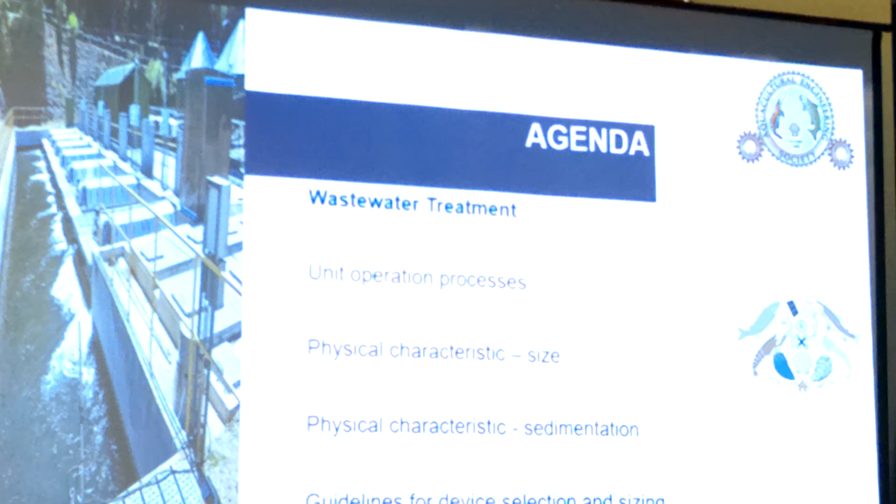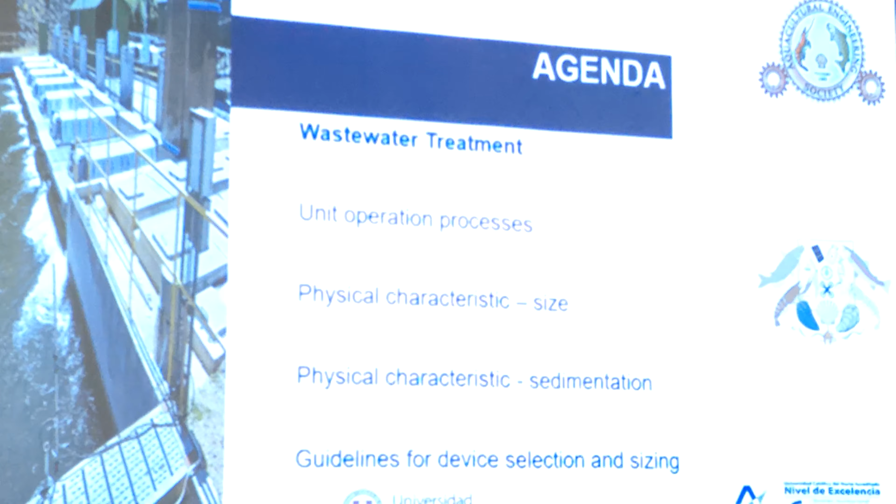So you're welcome to visit that. The topic I'd like to go through today is wastewater treatment, unit operation processes, physical characteristics, size, sedimentation, and finally some general guidelines for device selection and sizing.

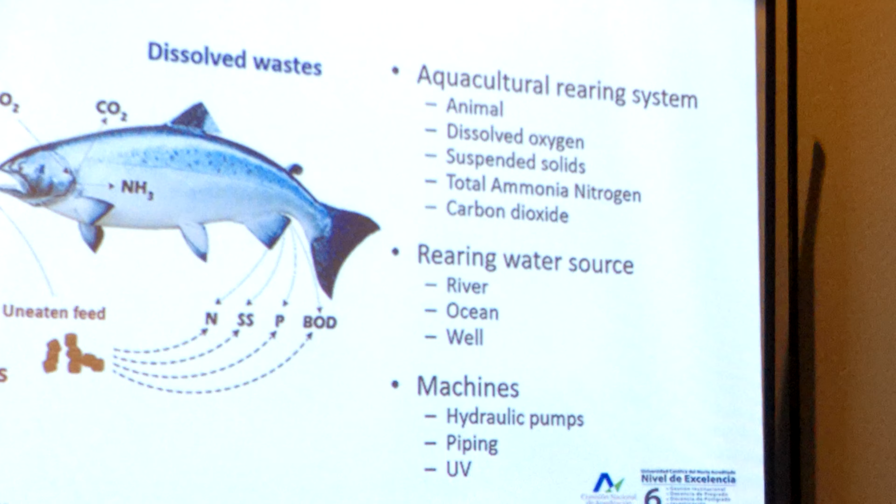But as you can see here, in aquaculture, everything starts with feeding your animals. And when you feed your animals, all the trouble starts when you look at it from the engineering perspective, because the biology of the fish or animal will be doing some transformation of that feed.

One of those transformations is taking the feed and doing some digestion, but not all feed will be digested, so feces will be released, and not all feed will be eaten, so some feed will be left. Those become particulate waste that, when you're doing a flow-through system, maybe it's not a big deal in your tank, but it will be a big deal in the environment.

But if you start doing partial recirculation, then it becomes a big deal. Then we need to go to the mass balances and try to figure out the concentration and flow rate to keep a certain load of solids in your system. And if you do full recirculation, it will be even worse if you don't take care of removing those solids.

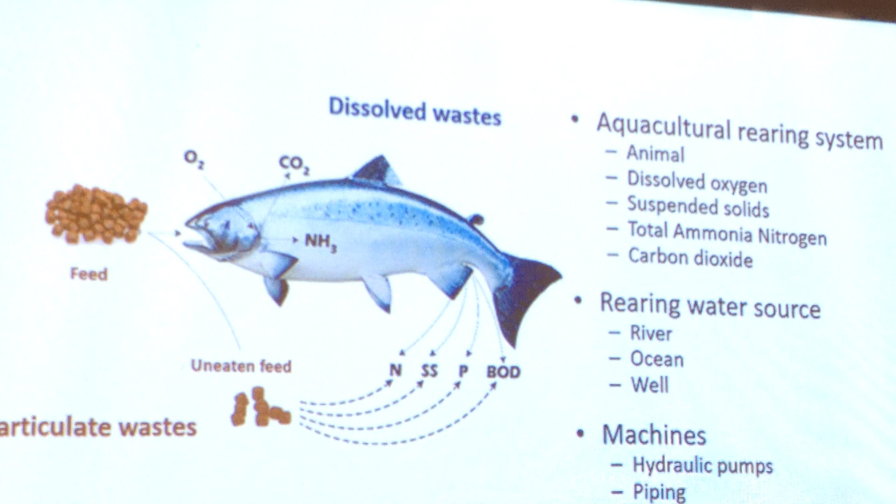Besides, if you have machines in your recirculation system, let's say a UV system, that UV system could not perform very well if your water is too dirty because of the presence of solids. Also, you have to design your piping very well so as to not allow solids to settle in the piping. We always talk about how many solids settle in our fish tanks or in our settling devices, but I don't know how many of you have looked at your piping - how many solids settle within your pipes?

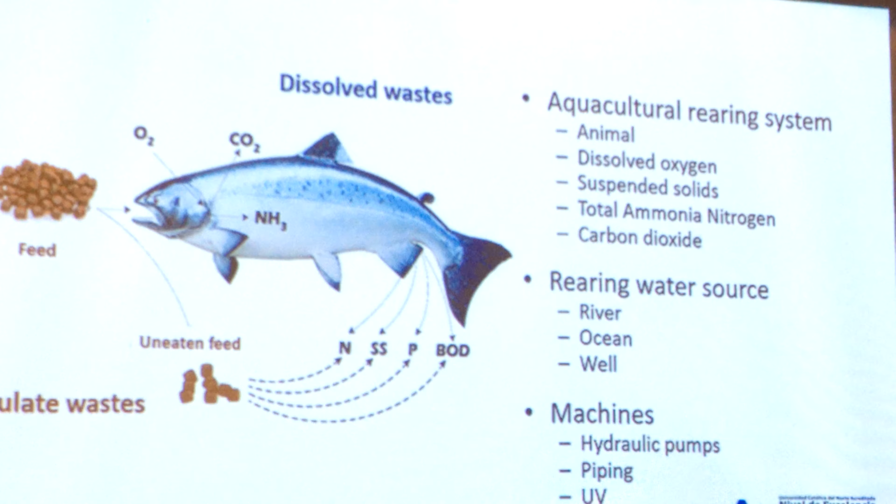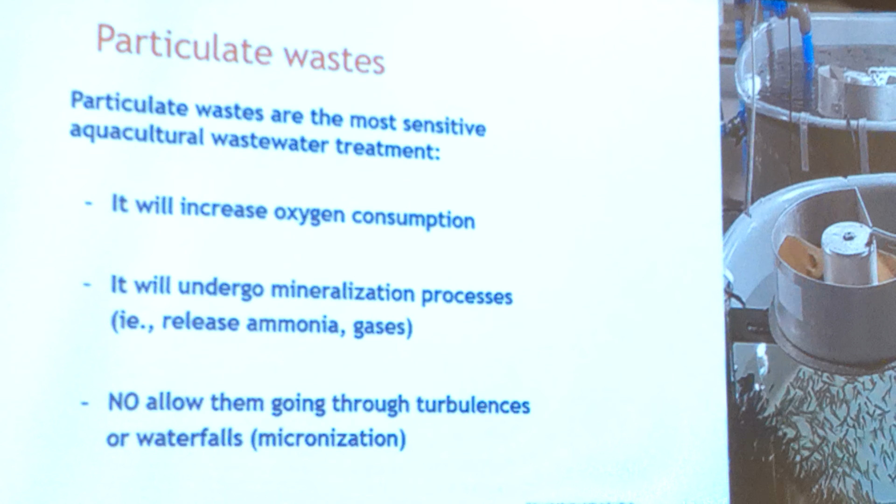So, saying that, why do we want to remove solids in the first place? Hopefully, I would say we're able to put a cannula in the anus of each fish, but that's impossible to do. So we want to remove the solids because if they stay too long in the water or in the system, they will go through several processes.

One of those could be mineralization. And if you're not doing aquaponics, you don't want other nutrients accumulating in your system. If you do aquaponics, you want the mineralization to happen, but otherwise you don't want that, because if mineralization occurs, you'll have a lot of bacteria doing the work, consuming a lot of oxygen, releasing more ammonia, and becoming flocculent and stuff like that.

Something that Ed, and especially the last talk, was discussing is tank design, and how you handle the solids. Solids are not like stones, they are very soft. Whatever waterfall or turbulence you have will break down those solids, and as they break down they become very small, making them more difficult to remove from your system.

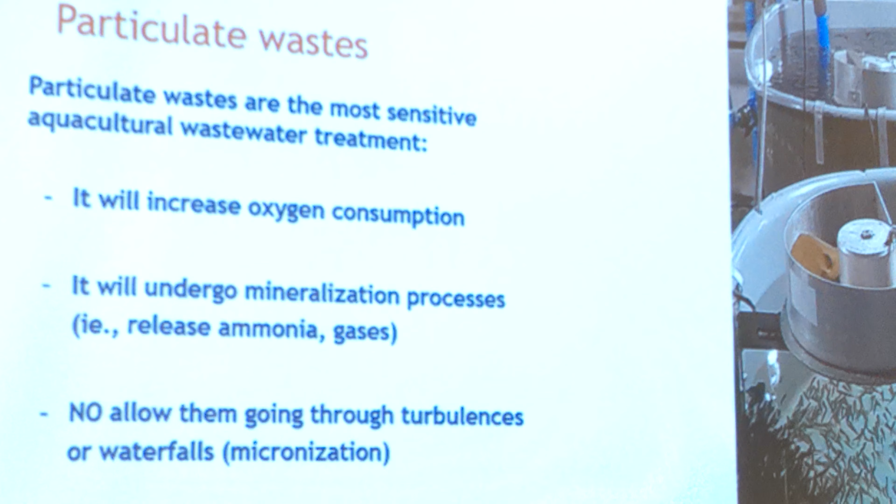So what do we know about solids? We call them total suspended solids, and there are differences between them. Dissolved solids are those less than 1.2 microns. Suspended solids are between 1.2 microns and 100 microns, and take more than an hour to settle. Settleable suspended solids are usually more than 100 microns, and will roughly settle within an hour. That's the differentiation of solids, and why you don't want the solids to become so small, because then it becomes very difficult to remove them.

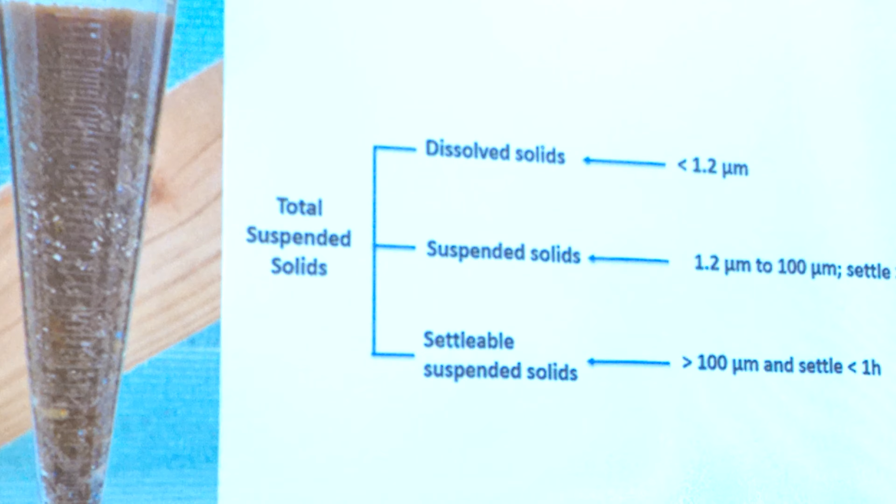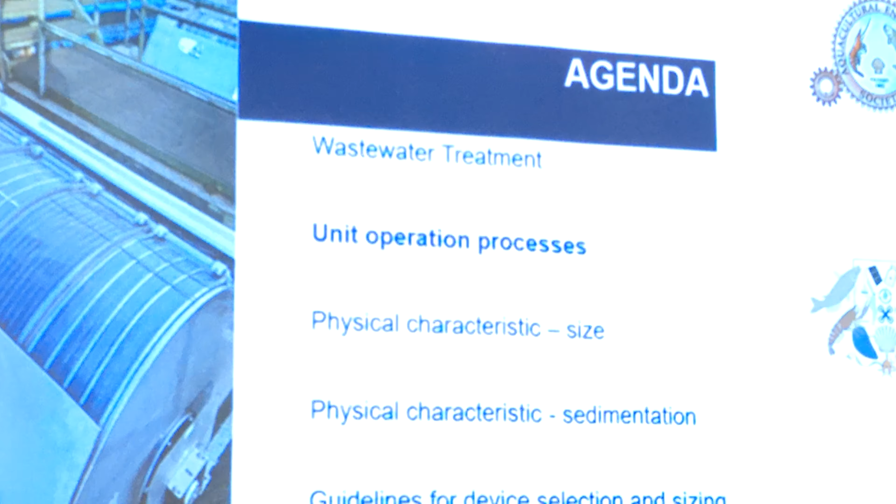Moving to the next topic about the unit operation process, this screen drum filter is running to treat the effluent from an open flow system growing salmon in Chile. What we'd like is to not have this water in our system. We'd like the water quality more or less right there, depending on the characteristics of the fish, or depending on your system and what you're doing.

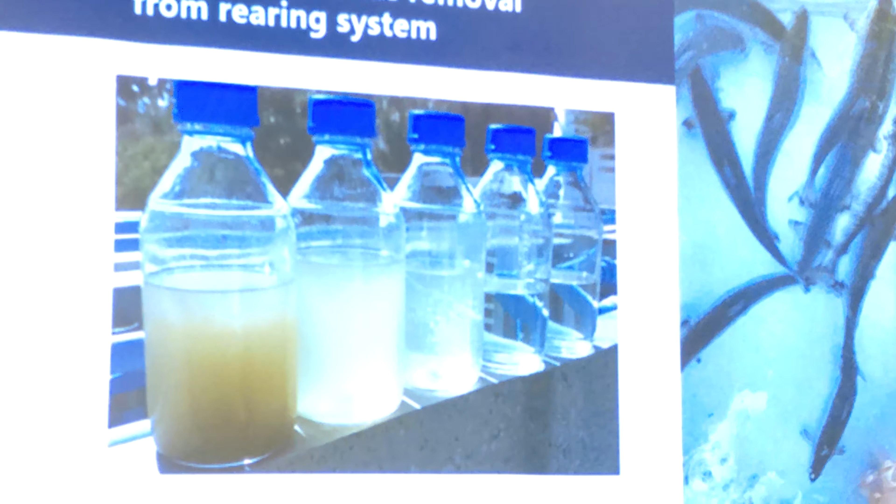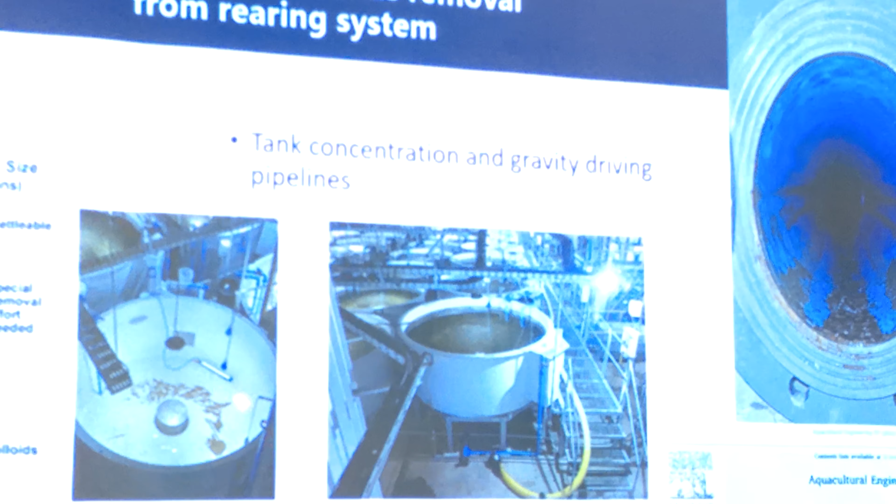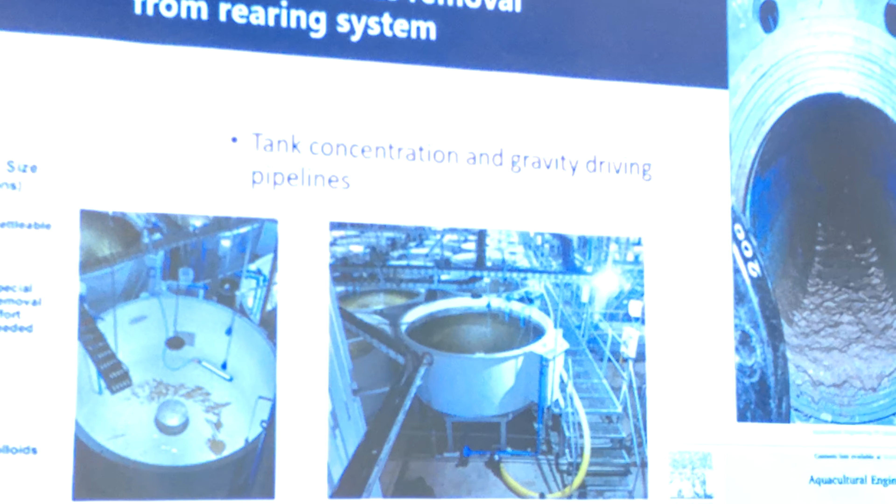So your whole system design starts with the tanks - how you design them so the solids produced in your system get removed from the device. Then when you remove them from your tank, they need to travel through your piping. But you have to take care with that, because if your piping doesn't have enough velocity, it could end up like this, or like this, or like this.

Sometimes we're not looking at what's happening in our piping. I'm not giving a talk about piping right now, so I'll leave that topic there. But we do have research on what velocity is needed in the piping, what range of numbers the flow has to run at to remove the solids, and what happens to the solids within the piping as they travel from the tank to the settling device, wherever that may be.

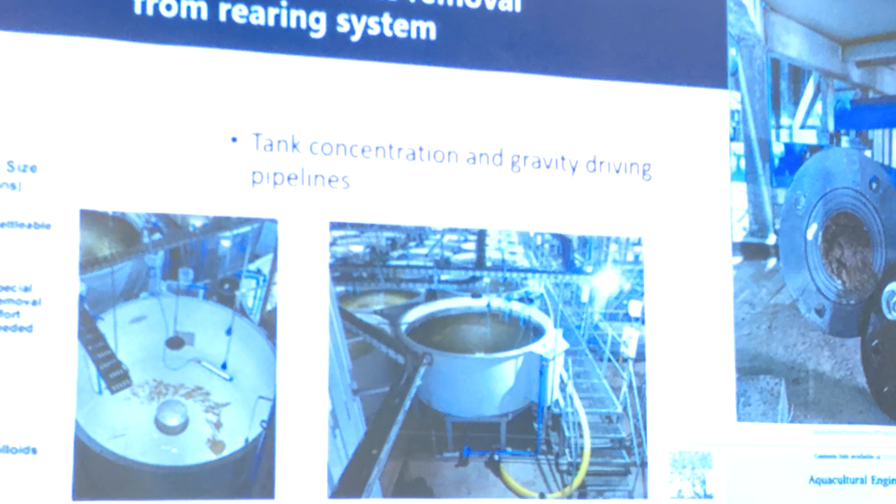In Chile right now, the largest tanks for raising salmon in recirculation systems are about 1,200 cubic meters, meaning about 15 meters in diameter, so the radius is roughly 8 meters. That determines the timing for the solids to travel to wherever they need to go for treatment.

Most of the time you'll have these kinds of devices settled or attached close to your tank - a settling device that could be either a swirl separator or a radial system, or sometimes pumps and settling tanks. This one is also located in Chile for an open flow system growing Atlantic salmon, working to get all the solids settled out.

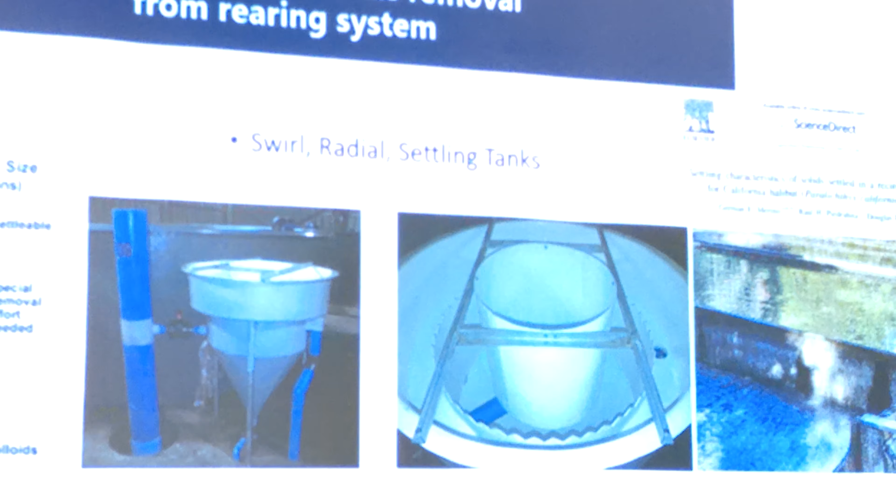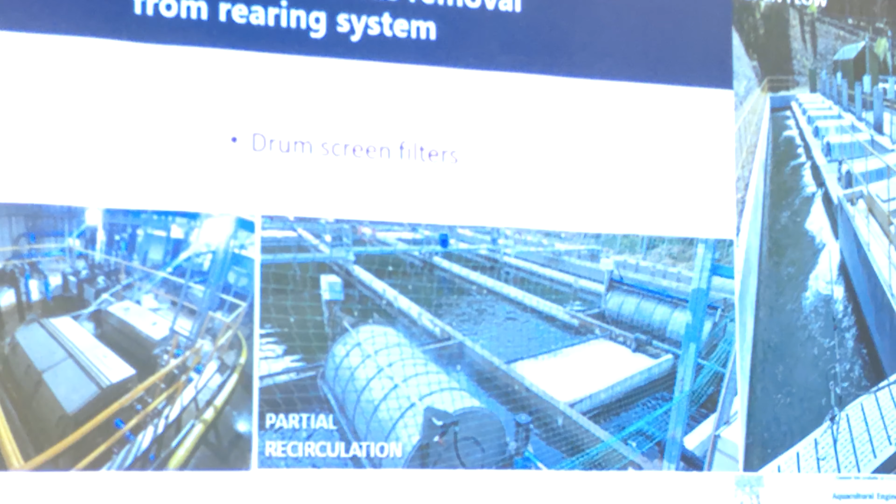The other device most commonly seen is the screen drum filter, used in RAS or partial recirculation systems, and also in open flow systems when releasing water to the environment. More recently in Chile, a few companies are also including foam fractionators to remove some solids, but in today's talk I'm not going to discuss foam fractionation - I'll just focus on settling devices and screen devices.

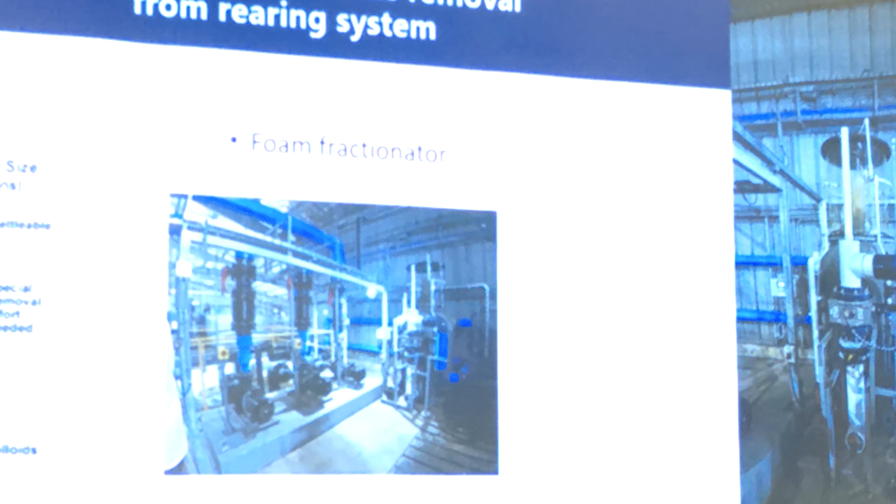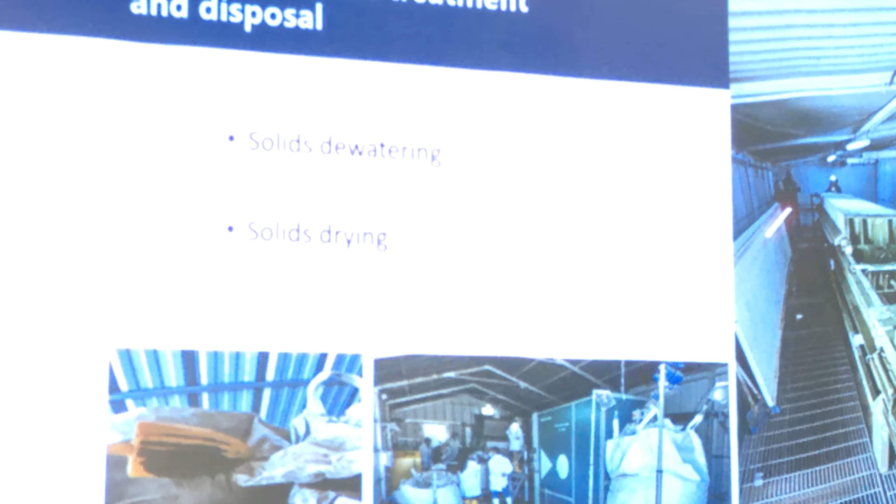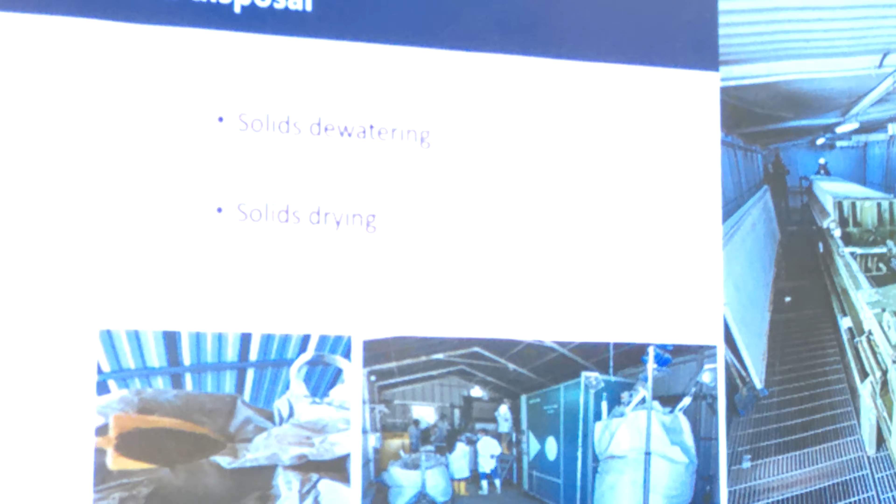But the story doesn't stop there. Once you have all these solids, you also need to work out how to dispose of them. This talk isn't about that either, but something we do in Chile with the solids - sometimes using other technology - is dry the solids, and you can see it looks like flour. Right now we're trying to figure out other uses for those solids instead of disposing of them in a landfill. Most efforts are looking at some kind of agricultural application.

So what about our physical characterizations? First of all, when we do the design...